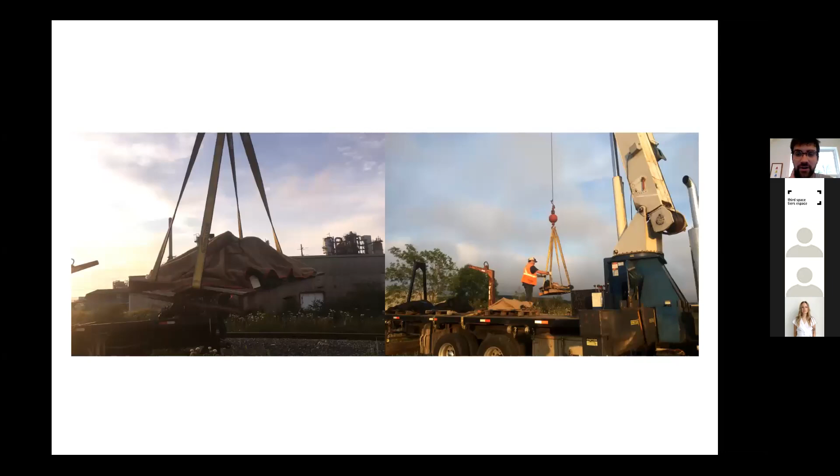They were then left to grow for the summer, and were transported. They were very heavy, so they were transported on a crane - Larry's crane, to be precise. They gave us a really great hand and were great supporters of the project. We transported these mounds all the way uptown.

The resulting form, with these boards and these boxed-in areas - we were going for a look of having these being kind of shipping crates. What we hoped it would do is create some interest in the site and generate an architectural form that would encourage people to go and engage and look closely at the materials themselves. Without these crates - which originally the idea was for practical considerations, actually moving these mounds, they might just spill out when they were on the truck, so they suggested we should box them in or at least cover them - because we had to crane lift them, we didn't end up boxing them in until they arrived on site. But we think this form really encourages interest and generates some intrigue if you don't know what's in that last box, for example, and you start looking a bit closer at the materials and hopefully get a bit more engaged then.

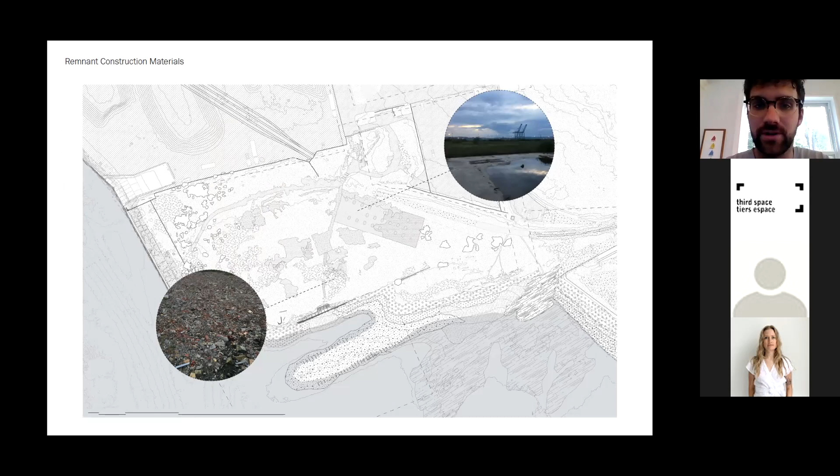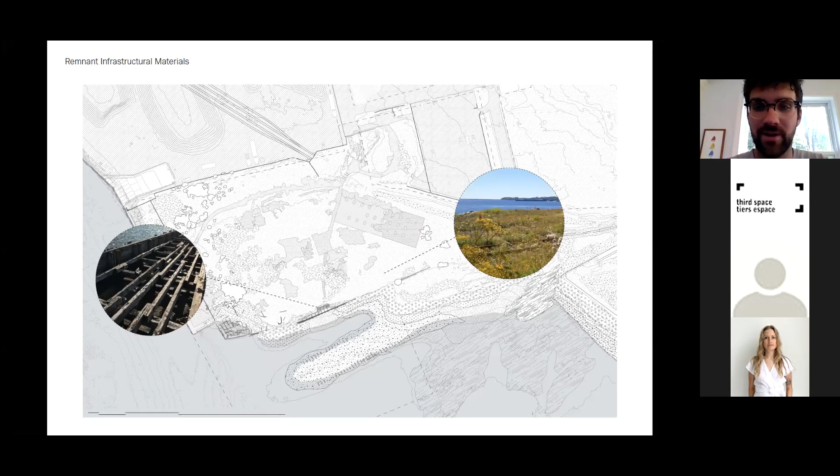So these were my initial studies of the Tin Can Beach site. I did a detailed drawing of the existing conditions on site and started an inventory of materials, even breaking it down to the different types of brick and different concrete aggregates, and seeing if I'd be able to source where those would have actually come from, which proved really difficult, but is something I'd still really love to continue to do.

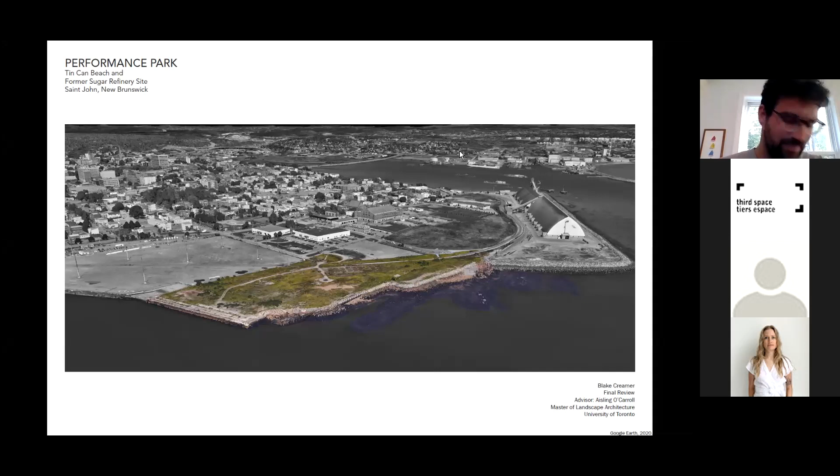My thesis work was looking at a proposal for the Tin Can Beach and former sugar refinery site. You'll recognize that aerial there. My proposal was called Performance Park.

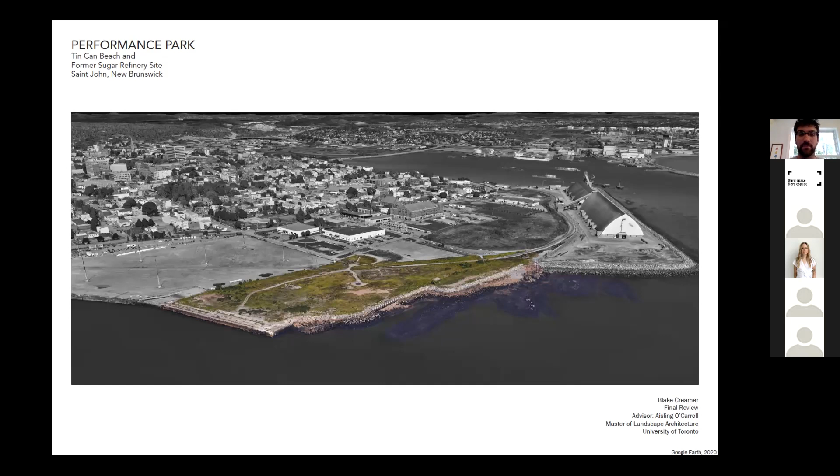I was talking about all of the different modes of performance that existed on the site, and especially focused on the vegetation on site and its potential, speaking about that spontaneous vegetation whose performance, in a technical term, I found really interesting. I started considering the potential of this site as a place for testing the performance of a few different things. What really became a vision was for community engagement on this site that dealt with existing materials, or took advantage of existing materials and existing conditions in the city to help engage people with the history that's embodied in the site.

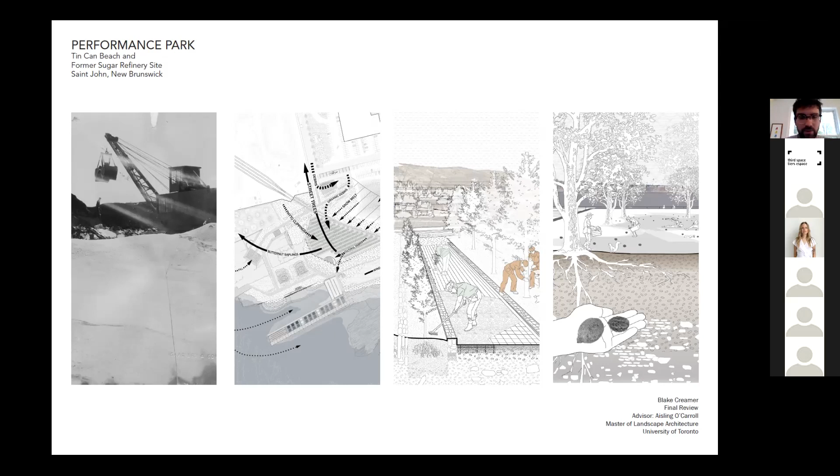These are just a selection of images, and I'll go through this fairly quickly, questions after. I was looking at this as a case study for post-industrial colonial waterfront sites, and how shipping arriving on these sites across the eastern seaboard has really impacted local vegetation and how people perceive those sites.

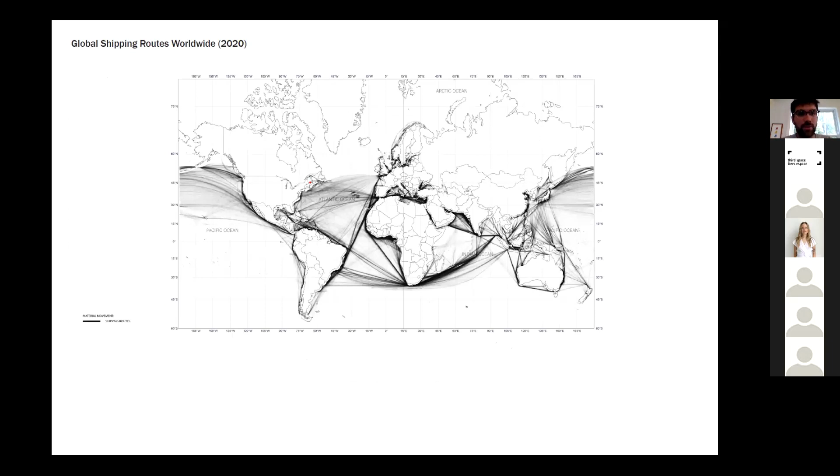I was looking at these global shipping routes and the historic shipping routes arriving in Saint John, and where the majority of ships were arriving from. Based on the thickness of the line, you can see a lot of Southeast Asian and European ships were arriving in Saint John. A lot of the species themselves that George Upham Hay uncovered on the site kind of match this alignment.

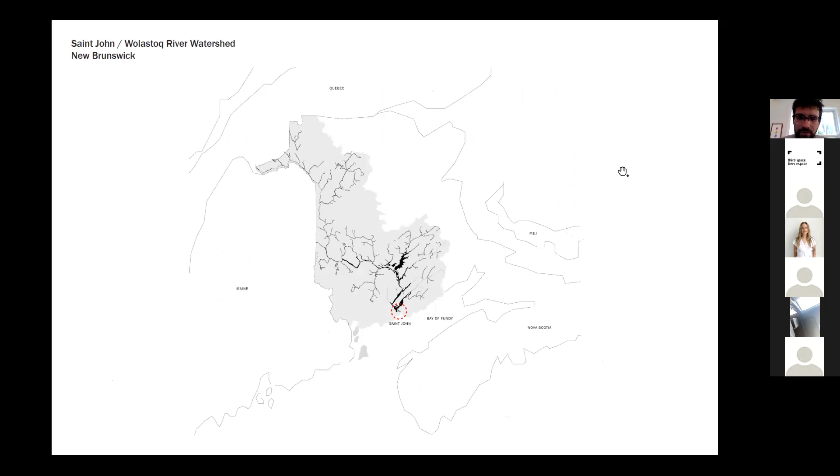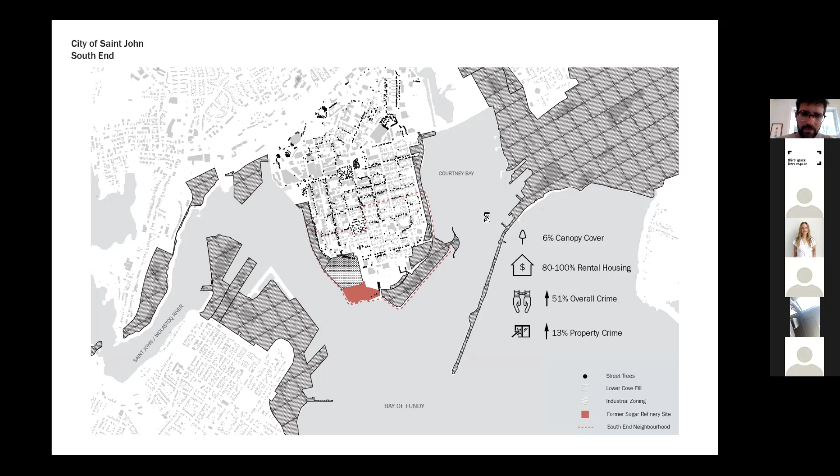For Saint John, I'll skip through a lot of these slides, but ultimately this brings us to the development of the shoreline of the city itself, and how we acted as an exporter and as a marine hub, and how our city shoreline was formalized over time.

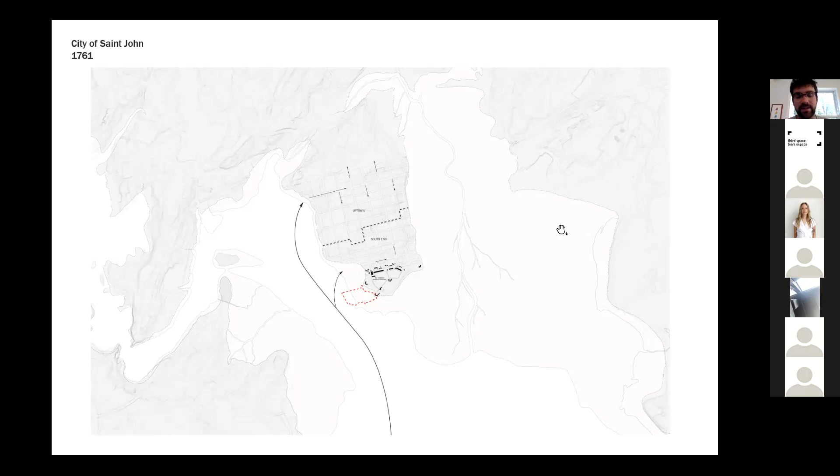The first action that formalized the city shoreline was blasting the city streets to form the first street grid, laid out in 1761 after at least 50 years of prior work. This involved blasting the bedrock on the peninsula and pushing that material down to the water's edge. By 1840 we had a complex series of wharfs and slips that made it a functional space.

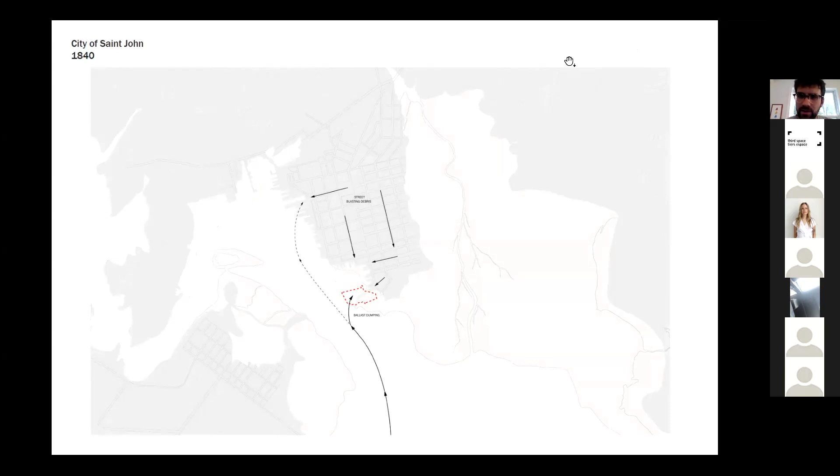By 1894, all the debris from the Great Fire had also been pushed to the city's edges, all the way down the coast at Market Slip and further into the Lower Cove, which were built up using a lot of that debris. This can be seen in any boreholes or test pits dug along this shoreline, where you find bits of burnt wood, broken pottery, and all sorts of materials.

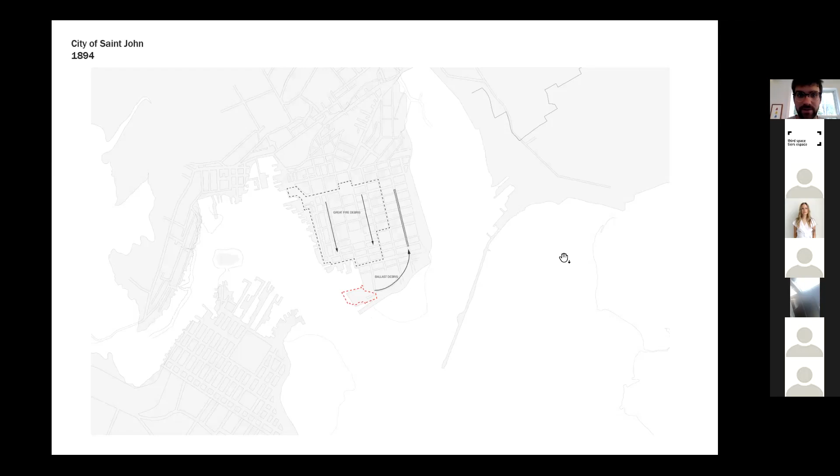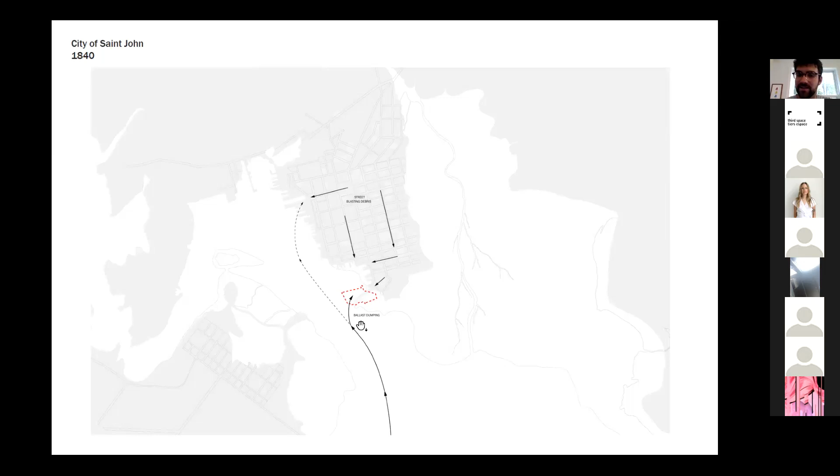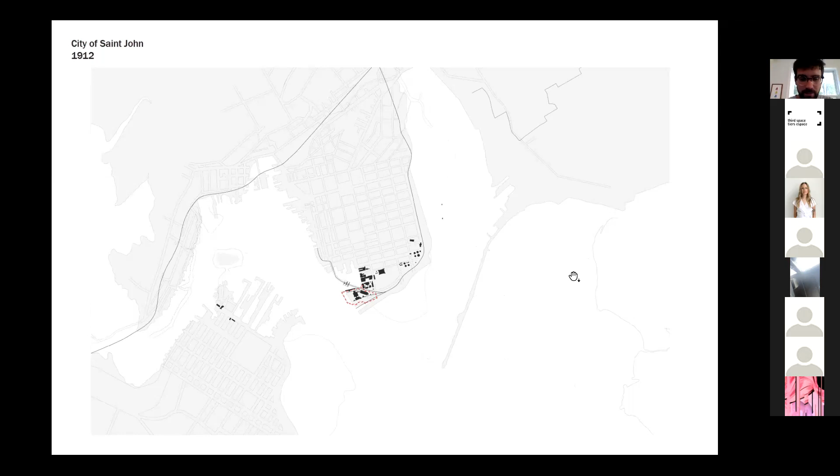In 1912, this area, formerly the ballast wharf, built up using ballast that had arrived over time, was formalized and became a stable site where they could build and expand industrial operations. The sugar refinery was constructed then. In the 1970s, the Lower Cove itself was infilled, and the sugar refinery was demolished. Since 2004, it has stayed that way.

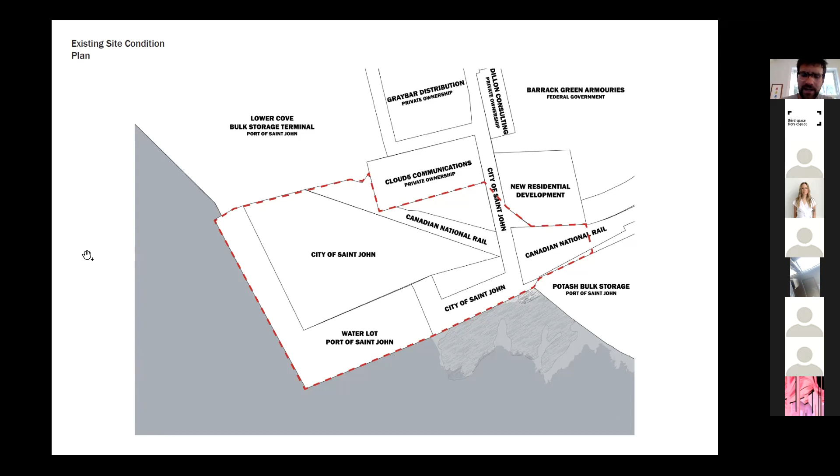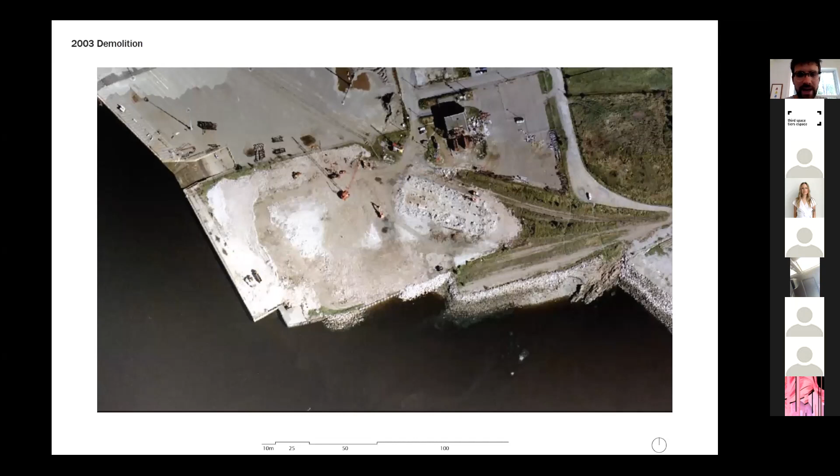Looking at the demolition—really what all the next slides do is look at the existing condition of the site, and how we can start looking closely at the materials on site and assessing their usefulness moving forward, and how we as a city can engage with these materials—the vegetative materials, the cultural materials, debris, remnant foundations—rather than just capping over the site.

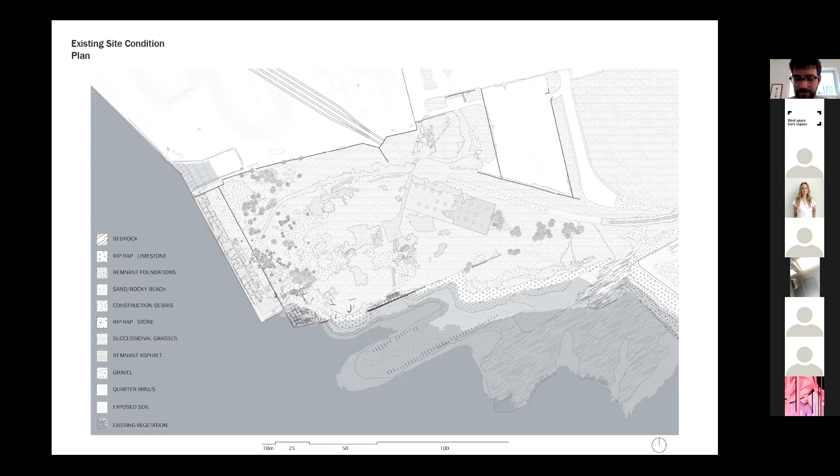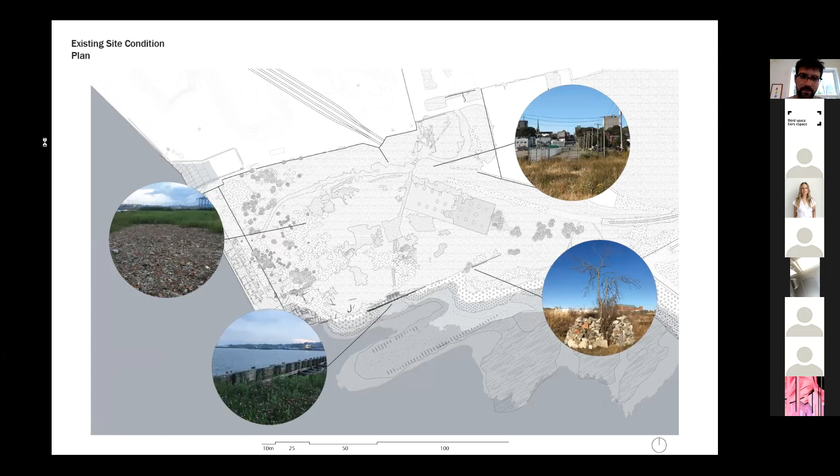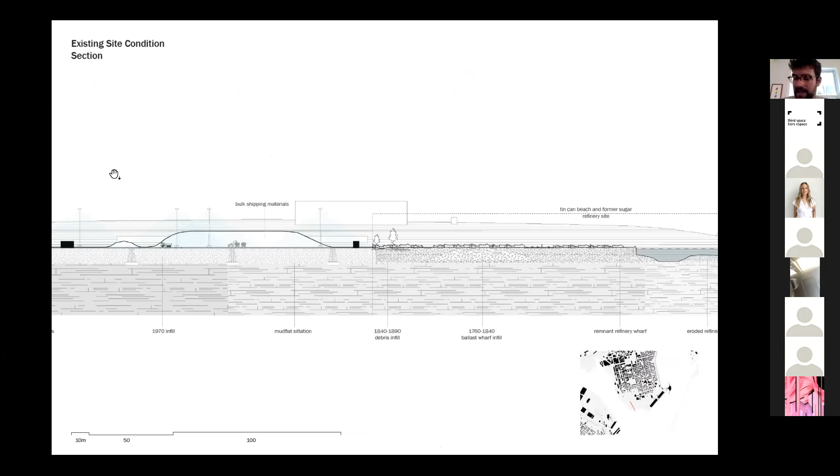The major issue with this area is that it is really contaminated from all the years of industrial use it's seen. That means any development on the site moving forward will have to be capped, with a limit where only a one-story building could be built there, or it could be used for recreational purposes.

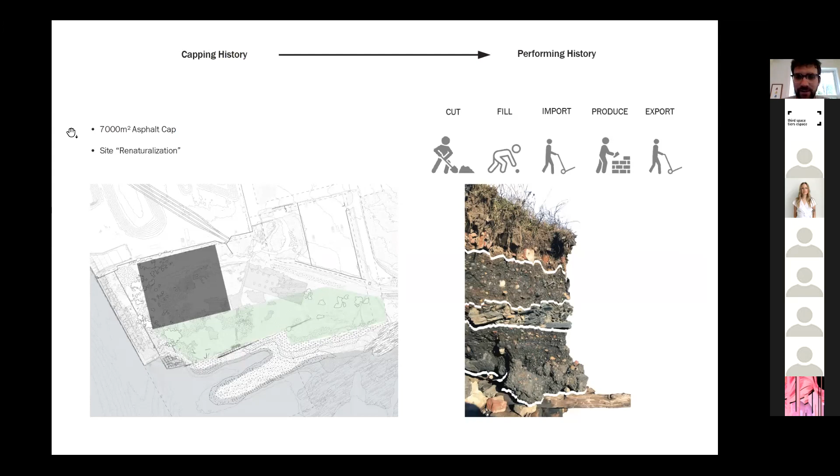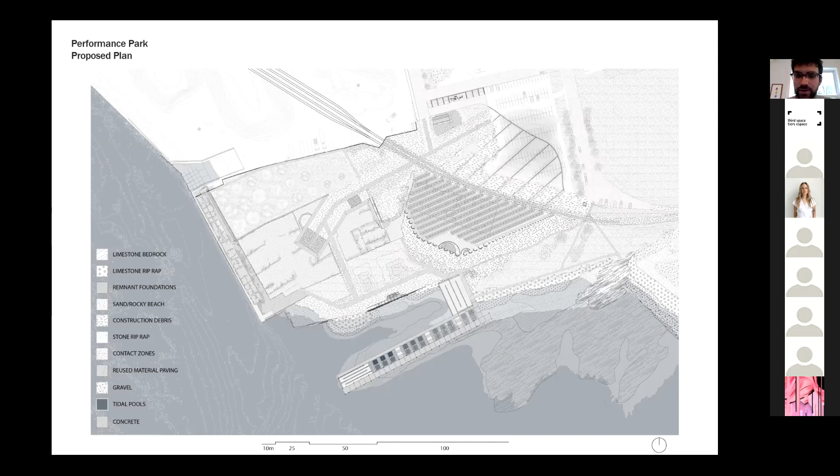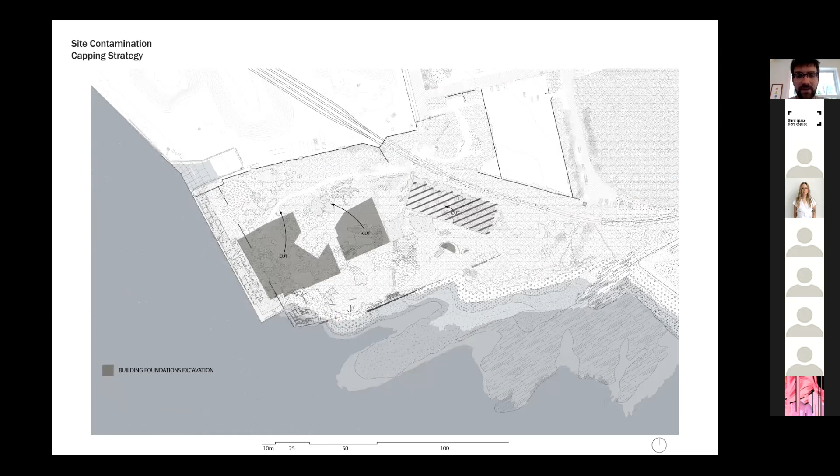To end, since I know I've been talking a long time, my proposal was to create a performance venue on the site that reused the existing building foundations, with a series of engaging actions and movements of materials to create different program areas, including a street tree nursery for the city's south end, as well as a seed orchard for butternut trees—a tree that historically has been significant, but also has a history of being moved.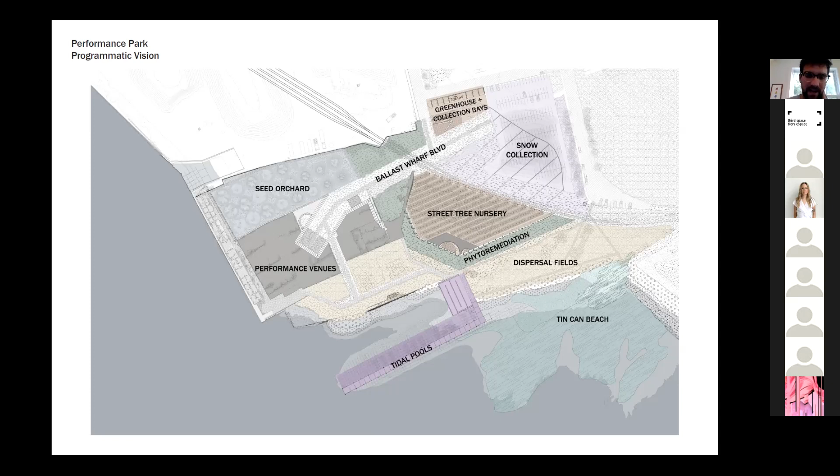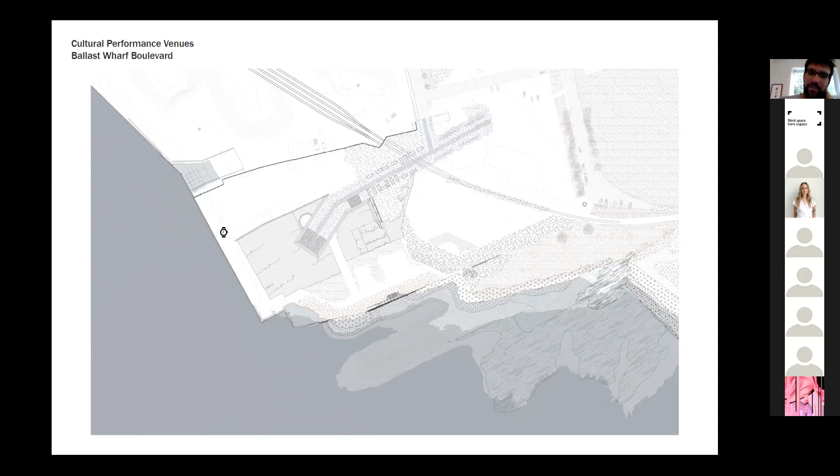The population of butternut trees in New Brunswick was actually introduced here by the Wolastoqiyik people, and it actually operates in isolation from the rest of its population.

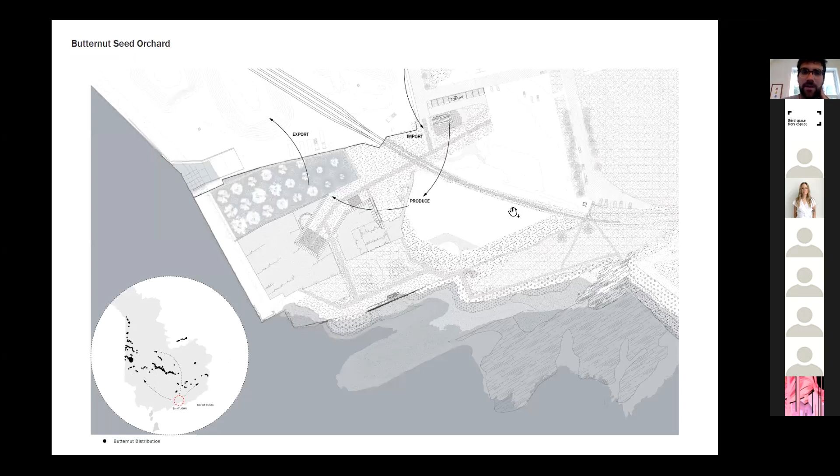So you can see here, the butternut trees are isolated, and butternut trees right now are being decimated by an imported canker. It's believed that our population of those species has increased resilience to them. So the idea was that with the street tree nursery and the seed orchard, people could begin engaging with the vegetation on site again and return the site to a kind of productive use, while continuing to think about the performance of all the vegetation on site, and how we could take advantage of that in providing a space for a cultural performance venue.

I know that these two presentations I've shown are a bit removed from each other, but I thought it might be helpful to show this kind of work as a way of introducing how I came to the point of an installation that actually transported a piece of the landscape that existed on this site, both current day and using historic materials, I guess where it had its roots.

So thank you for listening. I really appreciate the time. And if anyone has any questions, I'd be more than happy to answer them. Thank you.

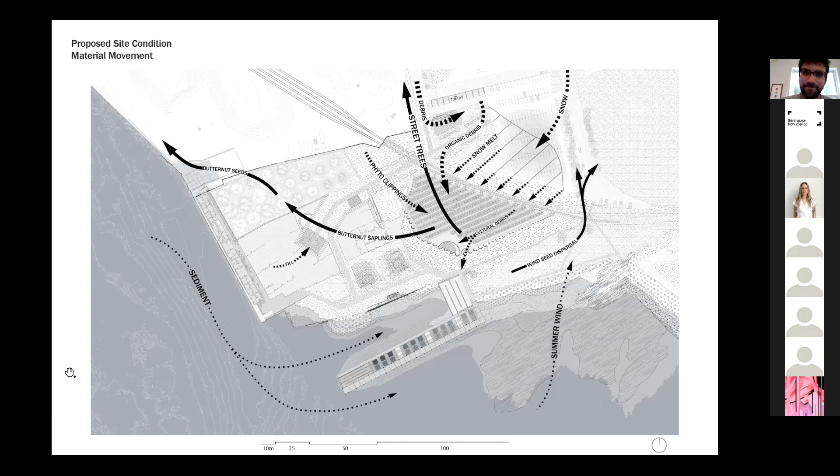Awesome. Thank you, Blake. It's really interesting to hear about your research in school, your thesis. I know anyone who's written a thesis has a million things to say on their topic. And it's just really interesting to hear the context around your third shift installation. I love those photos.

Who was it that took the photos where it's you? Yeah, Tim McGraw, Tim McGraw. Yeah, those are amazing. Yeah, I really like those. Yeah, he's really talented. Would you mind sending one to me for us to use to promote this recording? Of course. Yeah, awesome, thank you.

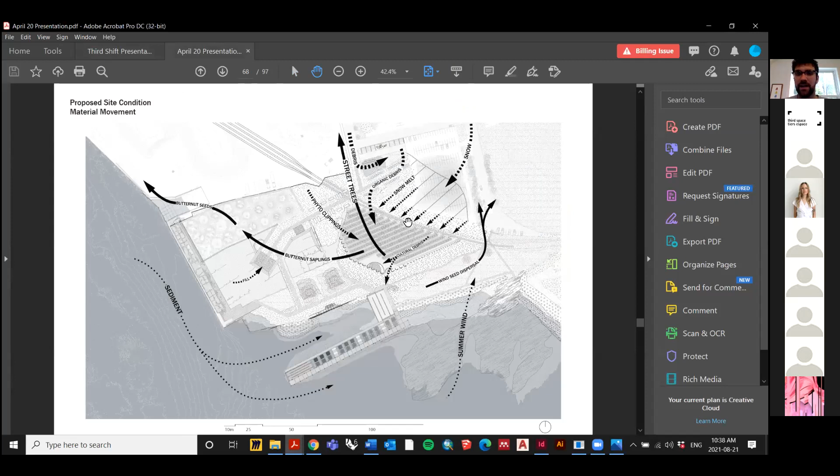Thanks, Hill. Yeah, for sure. I guess the driving force behind that, or for that, as something I was exploring in my thesis work, was that the city of Saint John doesn't have any street tree plan officially. There are certain areas of the city where there has been investment in street trees, but they've had a hard time maintaining and upkeeping those. Especially the city's south end is really lacking in any green space, really—not just open passive space like Tin Can Beach provides, or active space like Rainbow Park, but actual streetscapes that help lift up neighborhoods, and in summer provide shade and all the good benefits that street trees offer. So with my proposal itself, it was actually a series of interventions that would eventually remediate the soil enough so that street trees could be grown in this space.

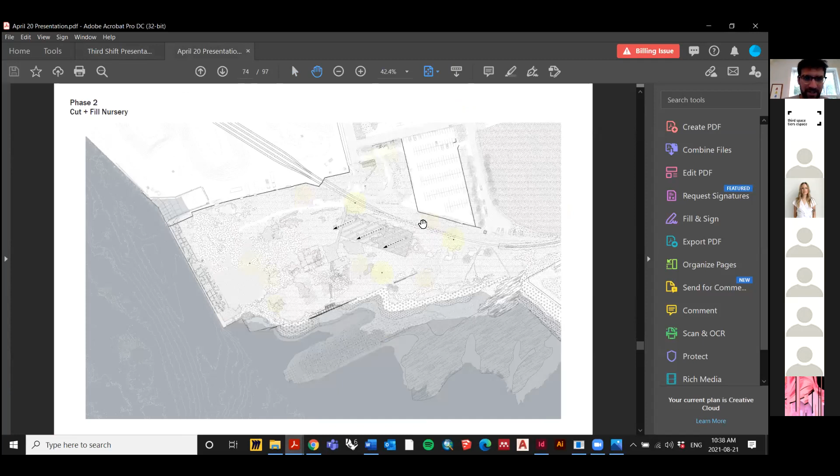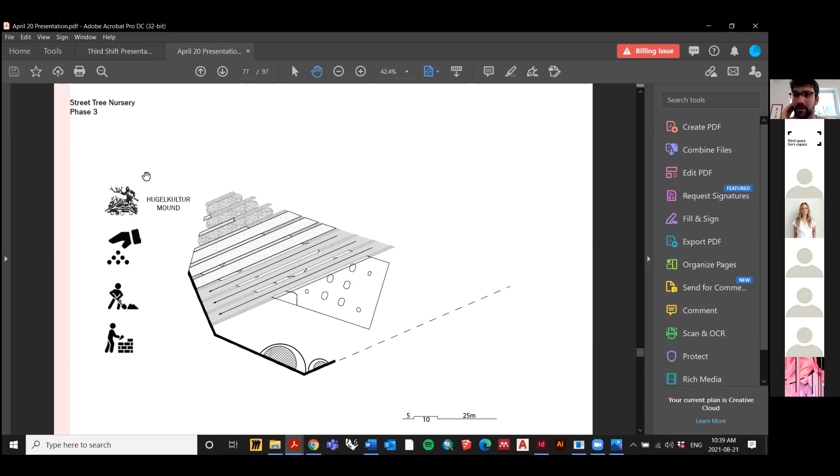So what that looked like, and I think if I scroll a little bit here, I can find them—my computer isn't cooperating really, but the hope was actually to use some of these historic species even. So to seed with red clover, to retain certain paths of travel in between existing foundations, to build up organic material from the city and from their maintenance staff that I was speaking with, in order to use this old technique of hugelkultur, which is basically mounding up, making a base of logs or debris, and then piling over with leaves and then soil, and allowing that to sit for years, like 5 to 8 years, which will decompose and really create a solid base of organic, high organic matter soil. So the idea was really to complete this process through and through.

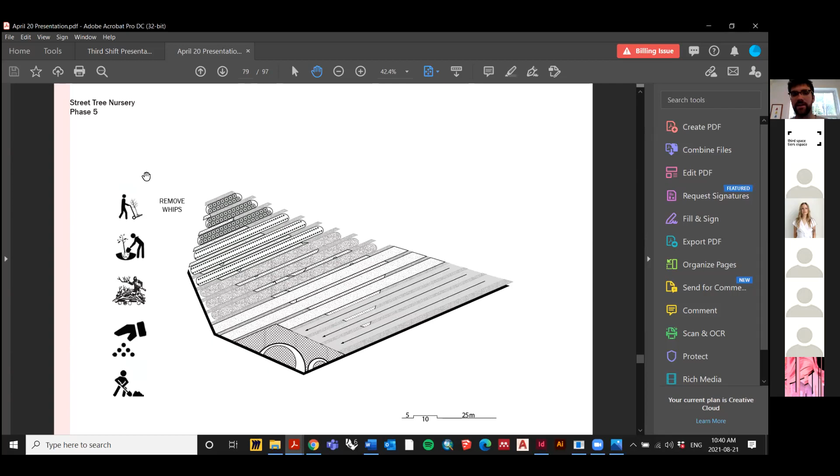So it was over the course of 25 years ultimately, in order to create this kind of street tree nursery. A place where the city itself—their biggest barrier to planting new trees is the cost, because they buy them directly from nurseries at like $350 or $450 a tree, and often aren't able to keep them up. So the idea is that if you grow trees in the setting, in the environmental conditions they'll eventually live in, they'd be more apt to be successful and less costly. It would provide young whips planted densely to distribute to the local population, like the South End, for their own planting, and then more mature trees over time for the city to take out. Then you'd amend the soil and repeat that process.

And here's just an image of how it could be imagined for use. Thank you.

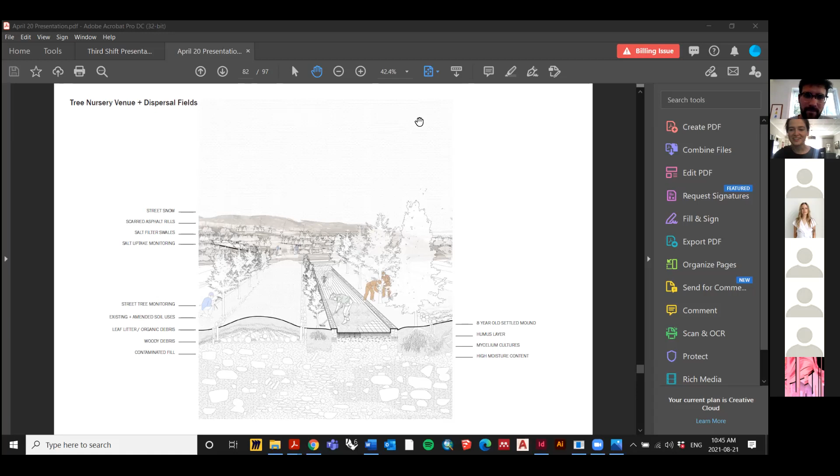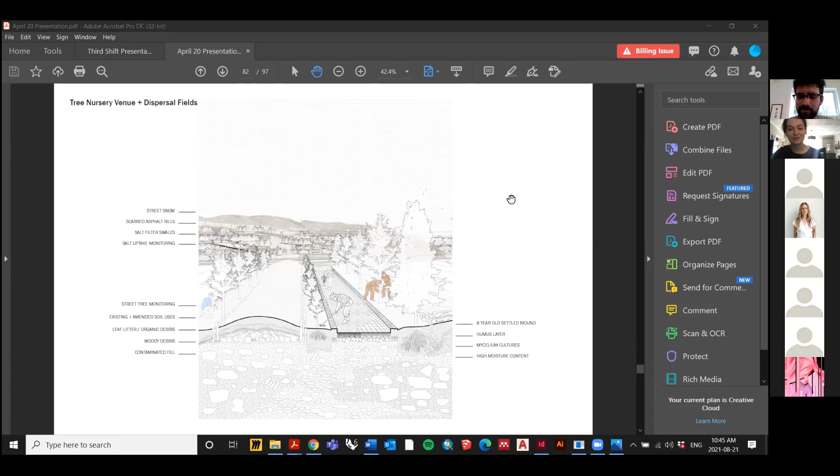Awesome project. I think it's really interesting how we often think of land as being inherently local, but your work demonstrates the international influence on the formation of the landscape, plus the introduction of plants. I wondered if you could talk a bit about your experience observing that international social history in the quote unquote natural landscape. Hope that makes sense.

Yeah, for sure. That's definitely what I've found so fascinating, that you do think about the land as being inherently local. I think especially at Tin Can Beach, and the former sugar refinery site, and all of these sites, the trend I've seen for approaches to redevelopment or engagement with these landscapes is to remediate them through whatever form is selected, or to cap them. And to me, of course, if something's really contaminated, you can't be exposed to that. But I think there's a real interest in engaging with that—not necessarily the contamination, but the history, the material history of a place.